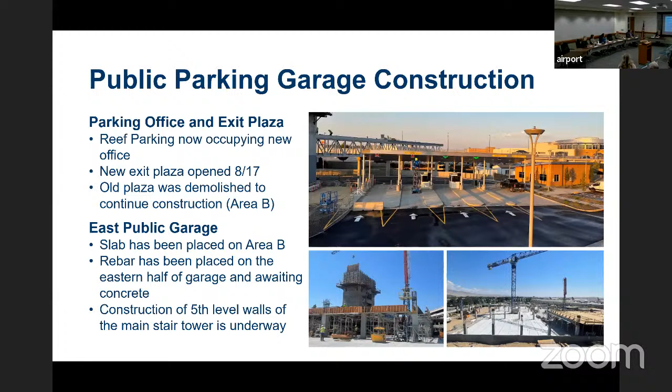The employee parking garage, which is on the opposite side of the existing public garage, is also starting to take shape. You can see that we've started pouring the footings for that, and the forms for the retaining wall are in place. The stair and elevator tower are being placed. So that is actually starting to look like a parking garage as well.

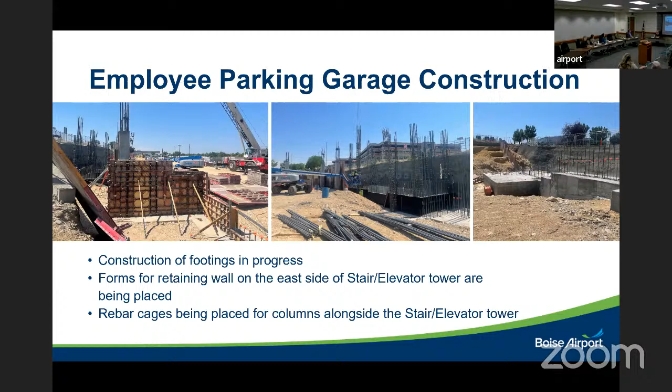More good news. As you walked in this morning, if you are paying attention, you may have noticed that we have started construction on expanding our checkpoint. This will be done in about 6 months, and it's phased to not interfere with our checkpoint operations, so it'll primarily happen at night. This will be to remove the 94.9, the river store, and queuing will go there. We'll actually add a 7th lane, and then the exit lane will be pushed over as you're facing the checkpoint to the left-hand side into that meet and greet area.

Taxi lane Sierra is also in progress. This is the taxi lane we're widening to accommodate larger aircraft that will be operated by Amazon as part of their new cargo facility. That is in progress - we're actually in phase 4. The cargo facility is also coming along, and we expect their first flight to be in early November.

As part of that project, we'll also be doing some improvements to Gowen Road for turning lanes, and we'll also be building a new access road into that area.

So lots of things happening. I was mentioning to some of you before commission started this morning, over the Labor Day weekend we were down to 300 spaces available total at the airport. That gives us a little bit of pause. It's great news - it means people are flying, people are traveling, and we're excited to see that rebound. However, that's not a lot of parking. When we think about what's coming in terms of Thanksgiving, traditionally one of our busiest travel seasons, we know we need to expand our existing lot. This has been in our plan for over a year, to expand our economy lot by over 300 spaces. The groundbreaking for that will take place in the middle of this month.

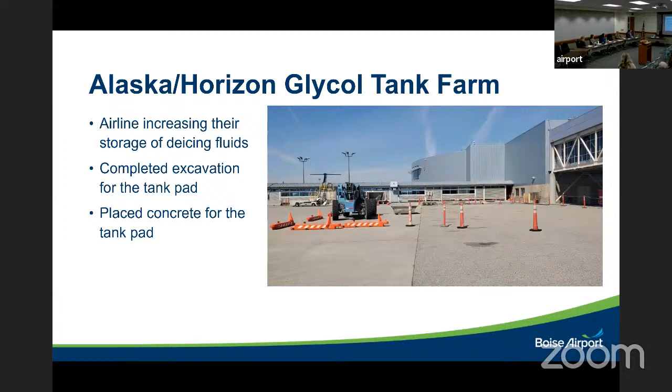This is a little bit more of a housekeeping item, but if you happen to see some construction going on out on our aircraft parking apron by the C gates, this is Alaska Airlines adding a new glycol tank. This is what they use for de-icing aircraft. So if you're ever flying out in the winter and they say we have to de-ice, this is the fluid they're using to de-ice the wings. They're just adding a larger tank here.

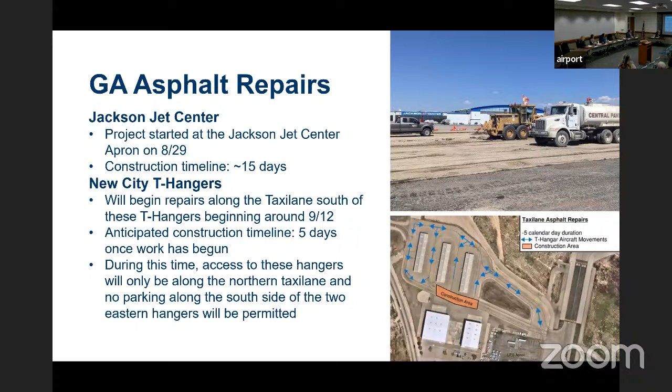We're also doing some repair to our asphalt in the general aviation parking and aircraft parking areas along Jackson Jet Center and the New City T hangars. This is just routine maintenance - we try to replace pavement every year. We have so much pavement here that by the time we get done replacing it all, it's time to start back at the beginning. So this is pretty routine work for us, but important.

We do have some air service updates. I don't know if you happened to see this in the news, but AHA, which was scheduled to come to Boise and fly nonstop from Boise to Reno, announced that they've entered bankruptcy. We're disappointed because that's one of the routes I think is coveted by our community in terms of nonstop service. But when you look at the economics of regional jet flying, it's becoming prohibitively expensive - between the cost for crews, pilot costs and pilot shortages, what it takes to recruit them, and incredibly high fuel costs. While they've come down, they're still at historic highs. So that is not going to happen. And I think you can say the same about the reductions in service from Alaska to some of these other destinations - it's all tied back to crew availability.

We did, however, have Spirit launch new nonstop service from Boise to Vegas, and in addition they granted a charitable donation of $20,000 to Global Gardens here in our community. So they're already working to make an impact. We also have Avelo, a new low-cost carrier that's entered our market, flying nonstop to Burbank. They're a new airline, and they celebrated their 1 millionth passenger - actually a passenger on the Boise flight. So they gave round trip vouchers to everyone on that flight, and they also added 10 vouchers hidden in the seats for the outbound flight. It was a nice celebration and some good public relations from them.

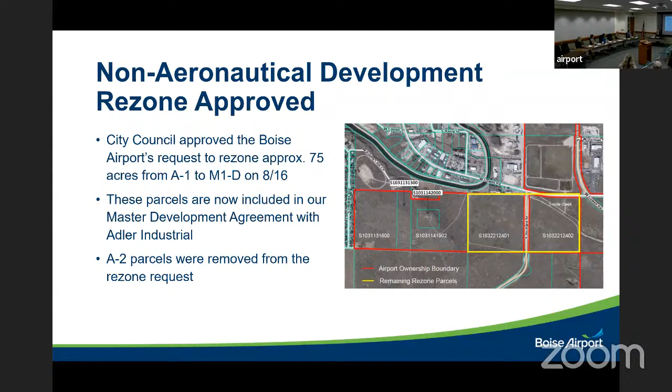We've been doing a lot of work here on capital projects, and there's no shortage of things to do. As Matt and I talk, every time we talk, we come up with some new projects that we need to be thinking about and working on. We will be hosting an open house. We are not actually hosting it at the airport because parking is at a premium. We've invited the American Institute of Architects, the American Council of Engineering Companies, and the Associated General Contractors to an open house to learn more about our upcoming projects. We get requests for meetings from different companies that want to meet with us and learn about the different projects and opportunities to do business with the airport. This allows us to do that type of meeting and presentation all in one venue, which is very beneficial for those who attend, as they have a keen interest in learning more about it. It's also very helpful for us to be able to direct everyone to this.

We also practiced our emergency exercise plan, which we do every 3 years. We hosted this on August 18th. It's required by the FAA, and by all reports, the exercise was a big success. So thank you to those who participated, because it is a pretty heavy lift.

We lost one of our key employees, Zack Thompson, unfortunately this spring, and we hosted a Workout of the Day commemoration event for him. We started with a heart healthy breakfast, as you know, he passed away from a heart attack.

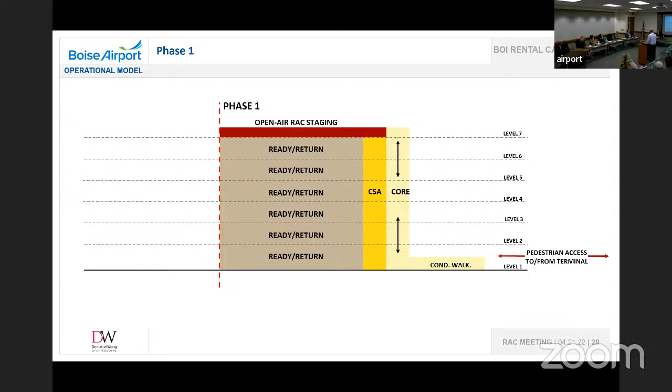Go ahead, location. Currently the rental cars are in this area, at the end of the baggage claim. It's going to be where the old State Aeronautics hangar was. Same route—people will come in and they will leave out Luke Street like they currently do. So the traffic pattern will pretty much stay the same.

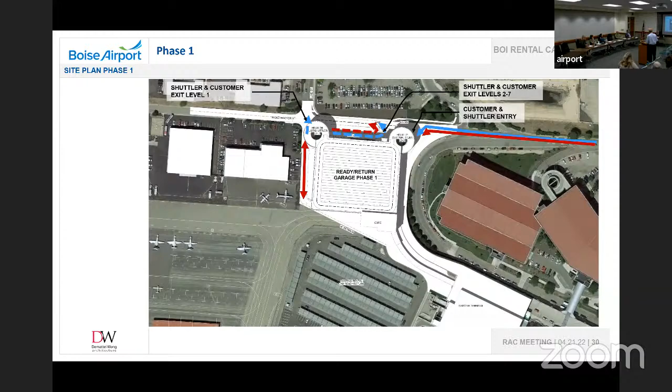So very, very tight location. We've crammed as much in there as we can. There was a lot of pressure from the rental cars to do more, but we held the line here. This is the limit for the concourse. So we basically designed the concourse geometry first, then established where we could build this. We'll have a covered walkway connecting from the baggage claim to here.

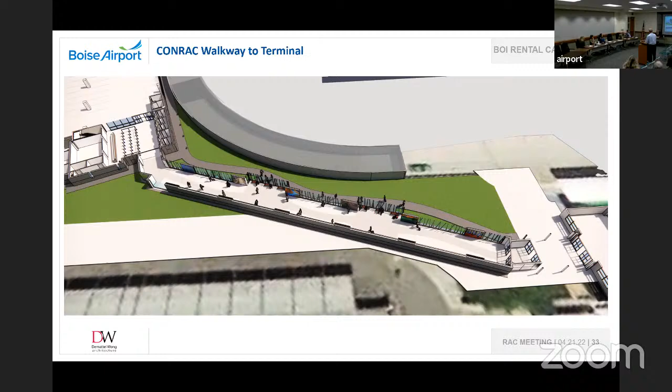Go ahead. We're currently just finishing up schematic design, about 30% design. And we just recently did a solicitation for a construction manager at risk for the construction part of it. We try getting them involved in schematic design so that they can bring a lot of value engineering, scheduling, and cost estimating.

We just completed that—McAlvain construction companies teamed up with Austin Commercial, and they'll be the contractor on the project. But for the design, it's a local firm—HDR is the lead architect, and they have Demattei Wong out of Dallas, Texas, as their Conrac specialist. That's all they do is Conracs.

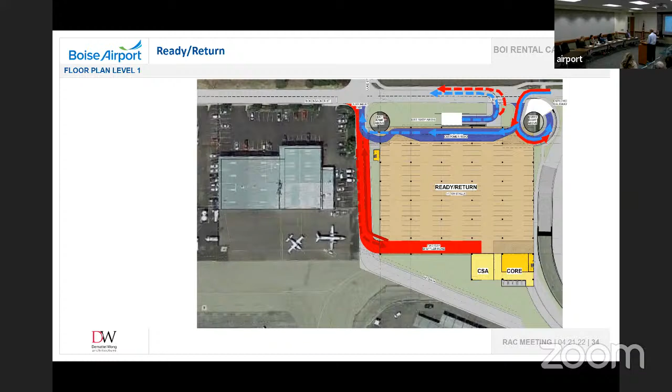A little bit of background: Conracs—there's only about 8 or 10 of them in the whole country, and it's kind of the trend to get those rental cars compact right adjacent to the airport to improve customer service for the rental cars. They're not busing them across town or anything like that. So this will actually set Boise up as a very first-class facility with a high level of customer service.

Ready return is laid out generically, but they'll park all different ways. Some park parallel, some at an angle, depending on the different companies.

How we divide the floor space will be based on market share and a bid process. They'll go through a formal RFP where they can bid on it, plus market share - quite a complex formula. That determines where the rental cars go, how much floor they get, or what position. Each company will have a customer service area on every floor for their branding.

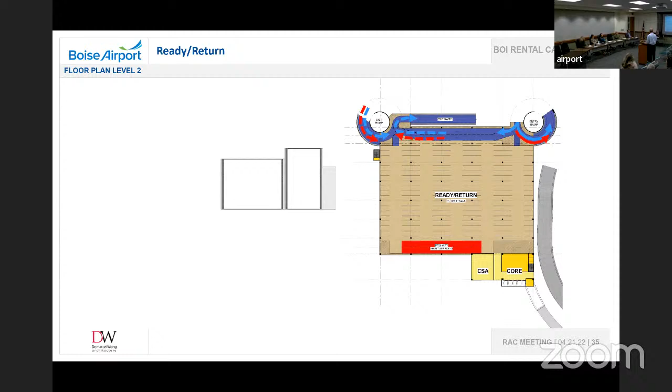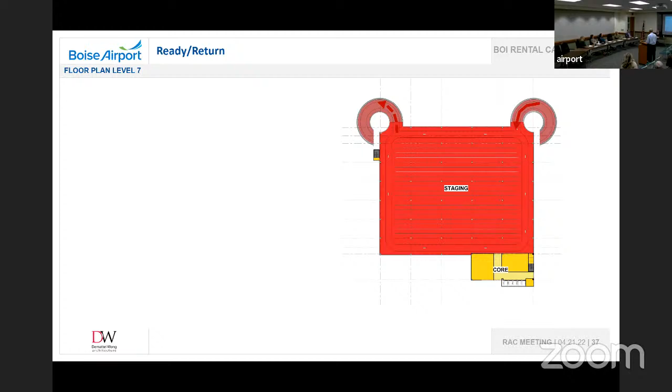That's on the upper deck - just storage where they park nose to tail and cram as many vehicles as possible. These are ready-to-go storage cars that are clean and ready, but they don't have space down below, so they store them up on top. Good use of that space.

Customer service area - this is a little bit. We're going to go through that.

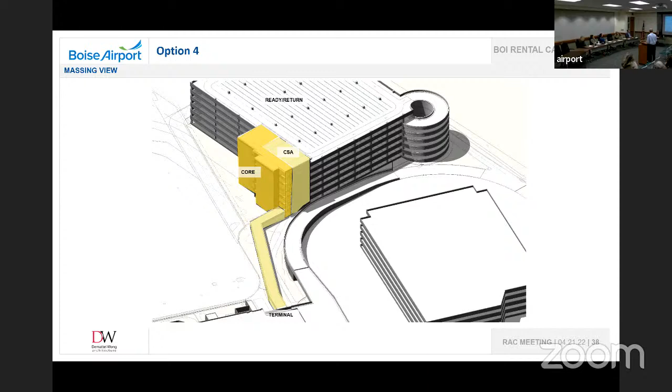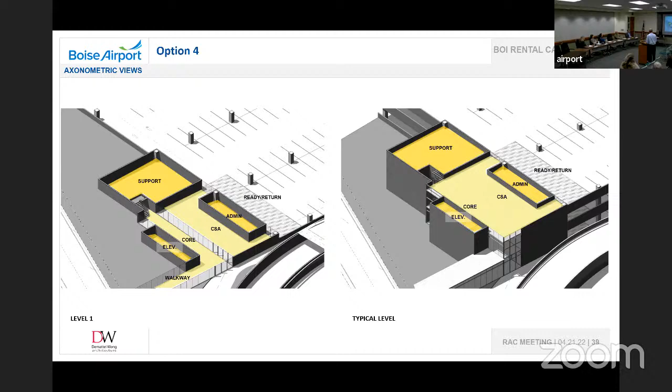This is just kind of some more renderings of it.

Phase one - we're planning to start construction probably about March next year, break ground on this. It's about a 2-year process, we'll finish up in 2025. Then in 2027, we'll begin construction of phase two, which is a quick turnaround area.

Essentially, this is where they do the fueling, the wash, and prepping the vehicle for the new lease. We're doing it on 3 levels - one level will serve 2 different ready return floors. Very complex, and it gets into a lot of complex code issues when you start fueling above ground and car washing in an unheated facility.

So this will be a very challenging one, but we're actually proceeding through schematic design on this so that we can get the code officials to agree to it.

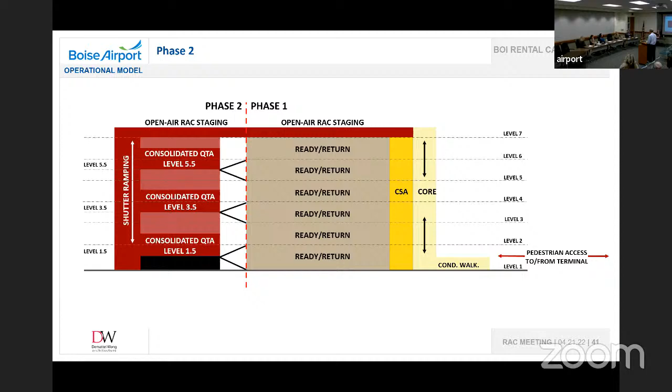You can kind of see here how it attaches on the west side there, and there will be a shuttle ramp here. The public will never go into this facility - it will just be employees.

This will take off a tremendous amount of traffic off the road because those cars transfer multiple times a day, and there's a constant shuttling of cars from offsite facilities. So it'll all be done internally in this facility, which improves efficiency and reduces cost for the rental cars. It also improves security because every time they get a car off site, there's potential for damage, theft, those kind of things, especially as you get larger.

Question, Matt. Where are they doing the fueling and washing now?

Currently on Wright Street, as you go down Wright Street below north of the garage right along the interstate, there's a couple of facilities there, and then there's a couple off-site airport, off-airport sites. So they're doing them all over.

Second question, I know with car washing, gray water is an issue in terms of disposal. We are incorporating a recycling of the water in here on the car wash.

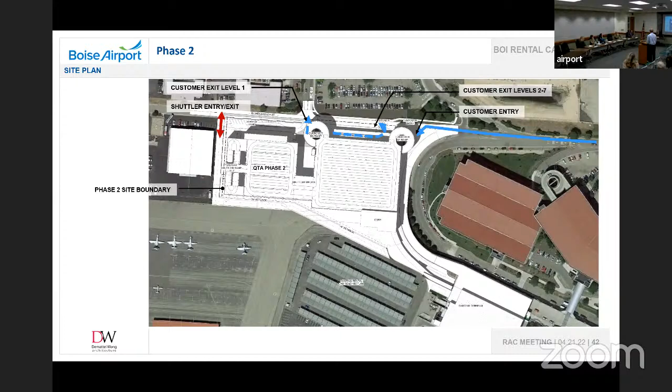This kind of shows a rendering of when we get finished. Just a point of reference, the employee garage is being constructed right here, so that'll shield it from the interstate - that'll be a 5-level garage. This will be the QTA in the future.

Once again, all the traffic will be very similar to this now, with the loop coming down there.

Matt, does that remove another hangar? Yes, there's currently the Gem State hangar right here, and that lease expires in summer 27, which is the timing of this plan.

This is consistent with the master plan that we've been carrying forward since 2017 and 18, so it's consistent with what we've been communicating to the tenants. In fact, we're actually working with that tenant - we've identified a site for a new hangar for them.

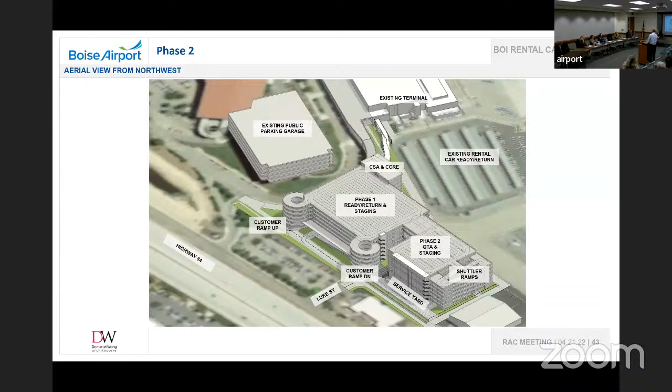I think that's the end of it.

Any questions? I told you the CFC is the funding source and the schedule, but right now everything's on schedule. The design's moving forward well, and the construction management at risk contract is finalized, and they'll be actively engaging in the design, giving input to the design team on value engineering, so we get the best economy we can.

Matt, what are you doing with the customer service area downstairs right now where the counters are?

We've got plans to repurpose that, several options. One is we're looking at possibly relocating our credentialing and operations down there, possibly some gift and storage, maybe some baggage-type functions. So there's several things we're exploring right now. But it won't be vacant, we'll repurpose it. We have the need.

Right, I'm sure ticket counters would like that spot too. It's a pretty prime spot, but yeah, that's a big space.

Matt, do any of the rental car companies currently have electric vehicles in their inventory? And if not, are they expecting you to anticipate that at this facility and be ready to go if they start adding those? They're dabbling with it right now.